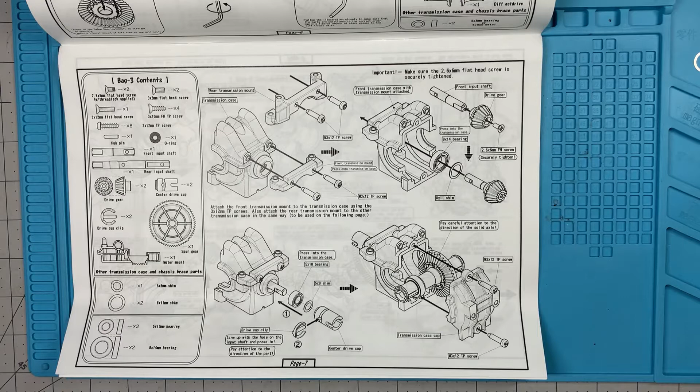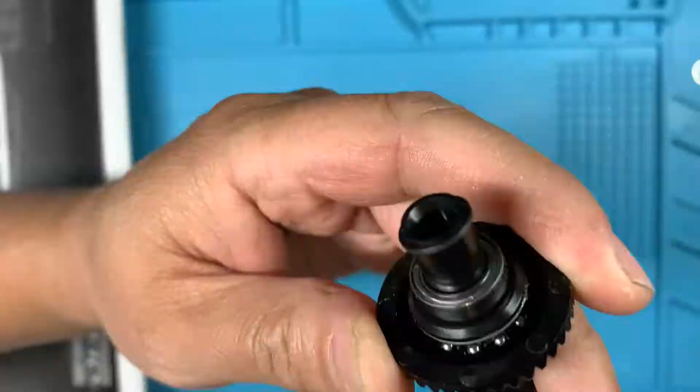Okay, real quick before we get started with this video, as you can see I have some Diff Lube here, and I'm going to apply it to the ball bearings before we get started. So I went back and put some Diff Lube into the ball bearings, just like the manual said. So now we're done, we can move on.

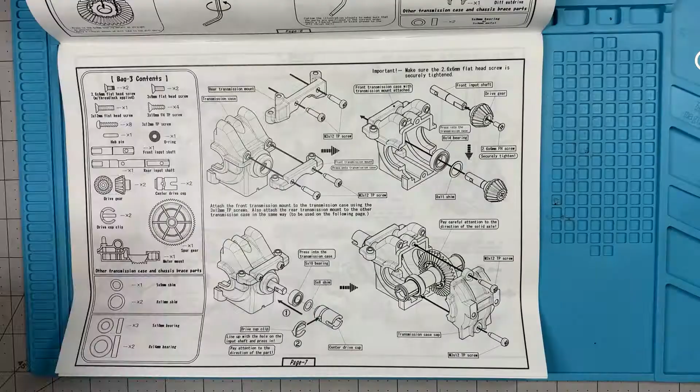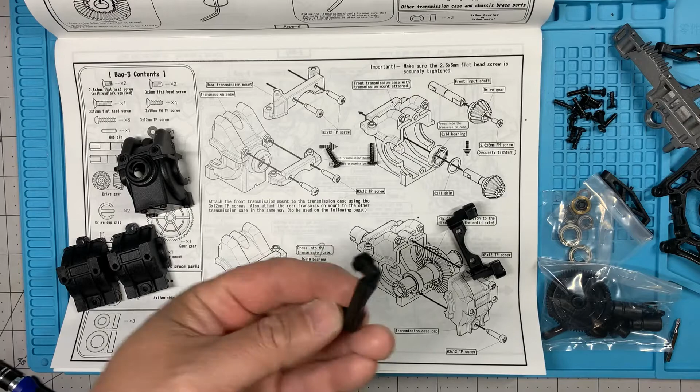We're going to need the contents of bag 3. You can see the transmission cases are identical front and rear, so let's go ahead and work on the front first. It's a little confusing even though it says rear transmission mount here, the top right here is actually the front. So the mount is going to be this piece right here, and it goes up this way like that, and just sits in there just like that. We're going to be using 2 of these M3 by 12 screws.

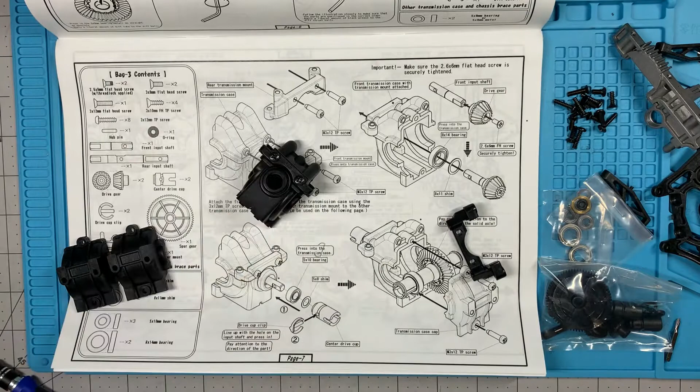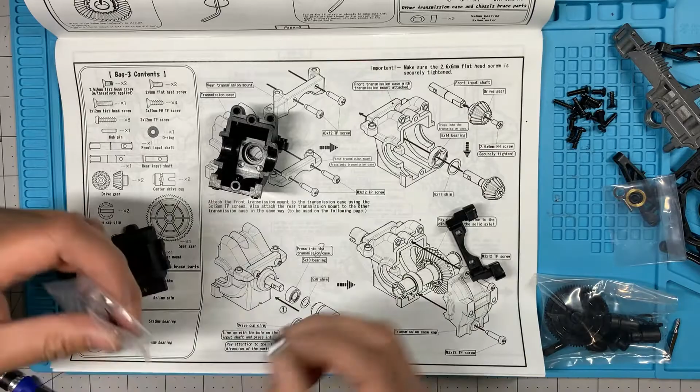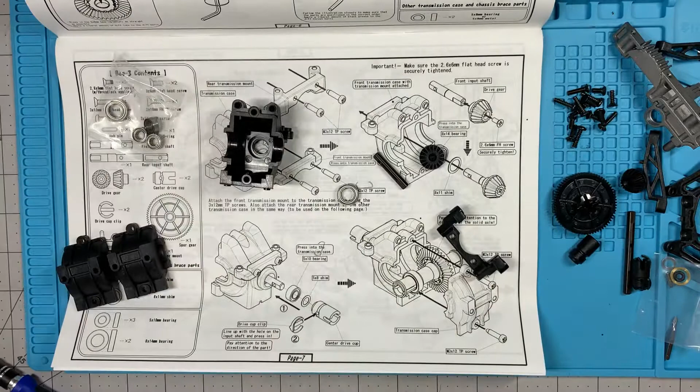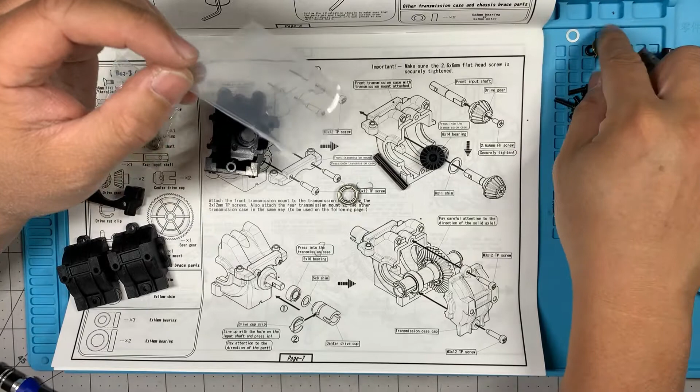Okay, next we're going to turn it over and put in the bearings. Looks like it's going to be that bearing. I'm going to need that. Going to need that. Set that aside. And we need to find the shim right here. Is there only one? I'm going to need 2. Okay, it's going to be this gold one right here.

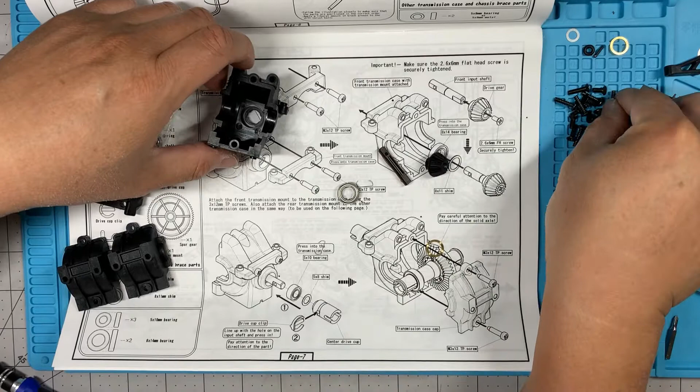So first we're going to build this, and we're going to need a flathead screw. I think it's this one right here, very, very small. Yep, you can see that there's a little bit of blue thread lock on the end here, so this is the one you want. And it's going to go through the gear. Okay, it should seat all the way in. So it's very clean, looks good. Just like that.

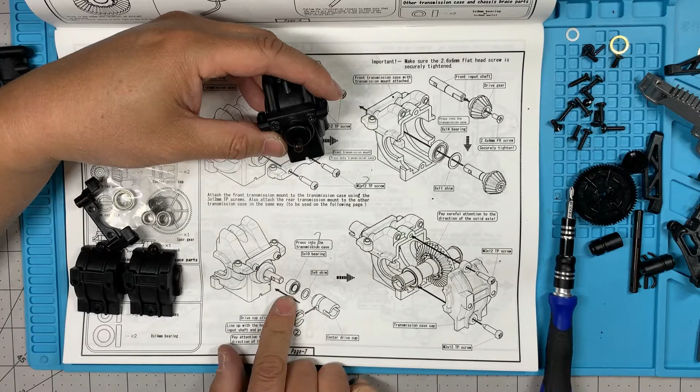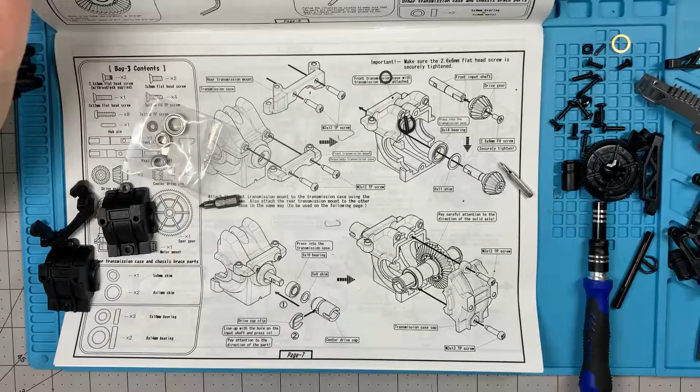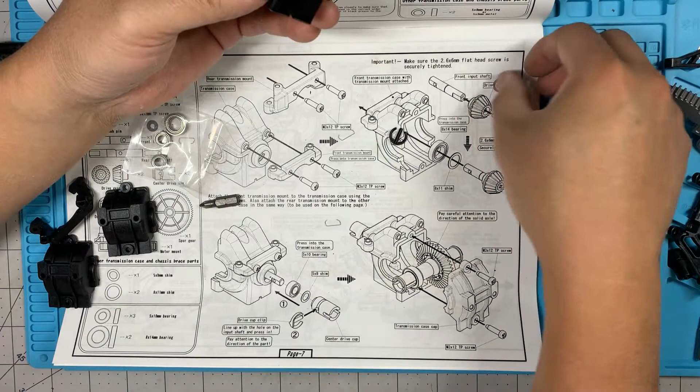And then on the front, on the other side, when it comes out on this side, we're going to need another bearing, a smaller shim, and then the drive cup. So it looks like it's going to be one of these smaller bearings. Okay, before you start assembling this, you have to make sure this bearing is flush against the face of the case there. So that's the bearing, and then the shim, and then the drive cup. If it's not all the way in, the drive cup will not line up with the input shaft.

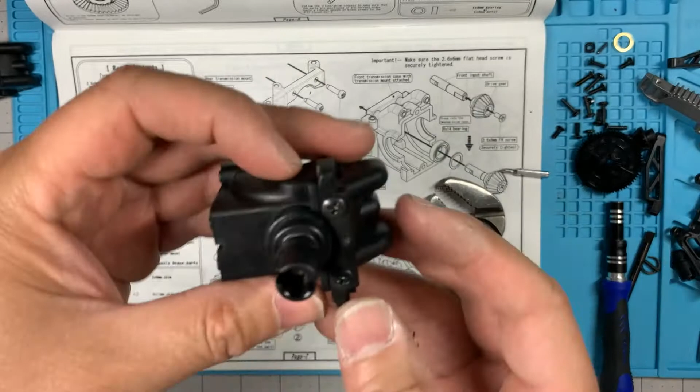See that hole? I'm just going to push this through. Now this piece right here has 2 sides, you can see it's shaped like that, and the hole is shaped like this, so you need to make sure this is turned correctly this way. Having a real hard time getting this to go through, so I'm just going to try this gently, and it goes right through. Just like that. Make sure it goes all the way in. Okay, it should look like that when you're done.

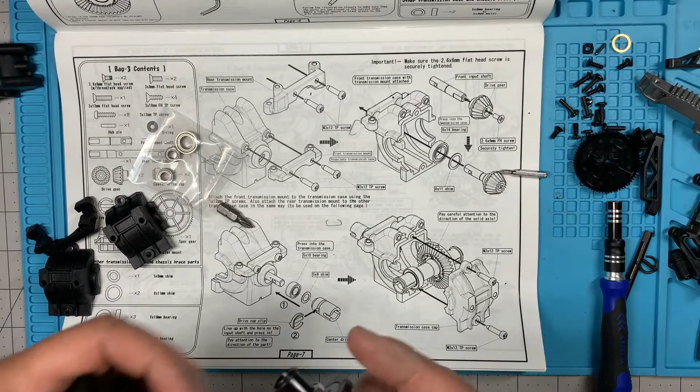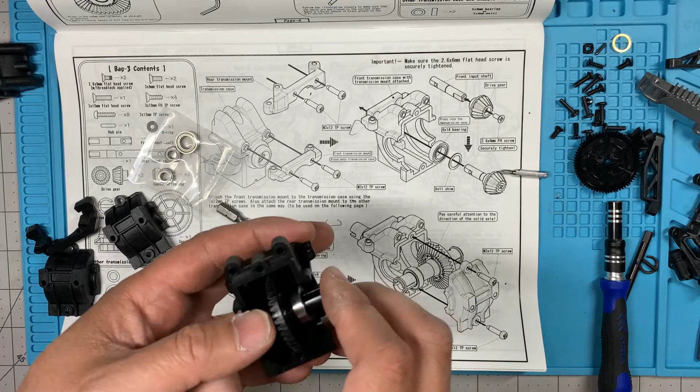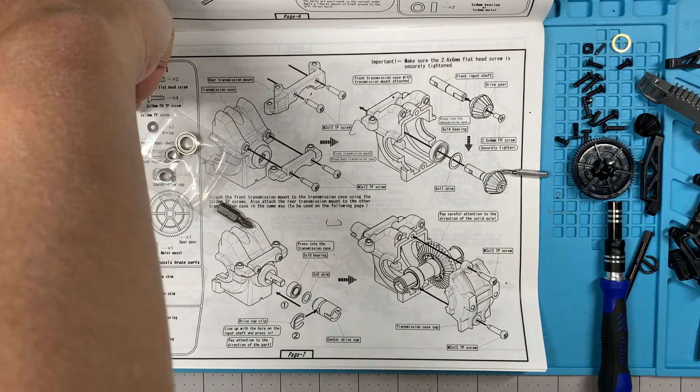Okay, let's move on. Remember, we're building the front transmission case right now, and the front diff actually looks like this. Remember, there's screws on this one. So let's line this up correctly. The mount is on top, and the gear goes this way, just like that. Line up with the bearings. Okay, the bearing seats right into the side of the transmission case. And then we're going to close it up with that, just like that, with a couple of the same screws. There's one, and there's another one right there, and it's going to go here and here.

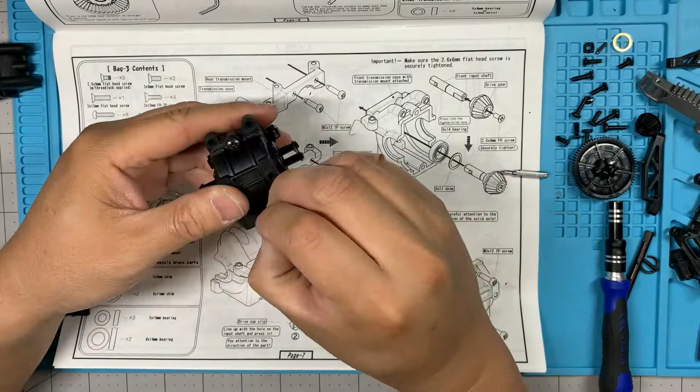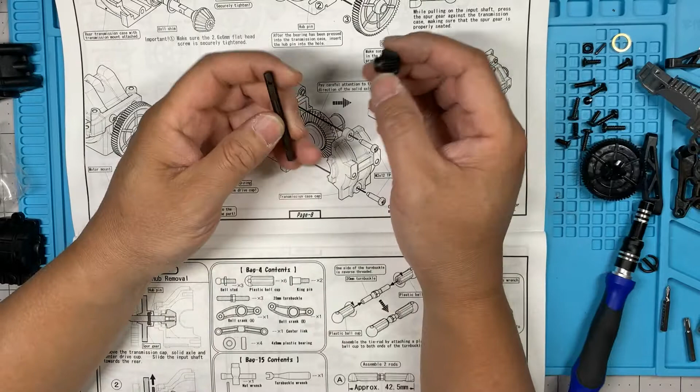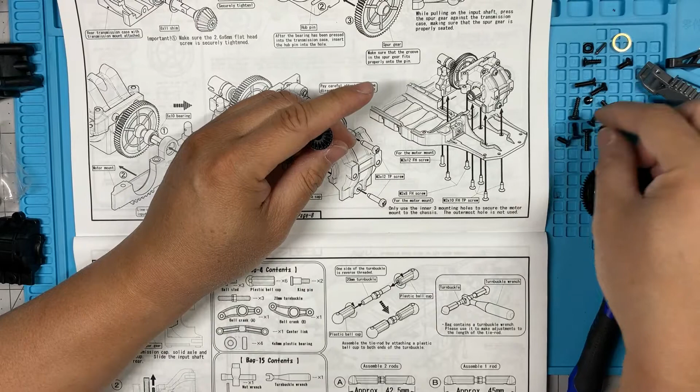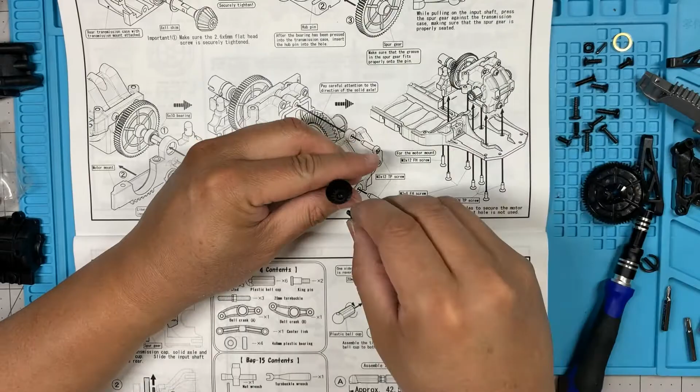Let's work on the rear gearbox, which is going to be very similar. We're going to build that gear again. So this time it's going to be this gear along with the longer drive shafts right here, and it's going to be this way. Just want to make sure it goes all the way in. And it's going to be the very small flathead screw with a little bit of Loctite at the end. There you go, it's that one. Just like that.

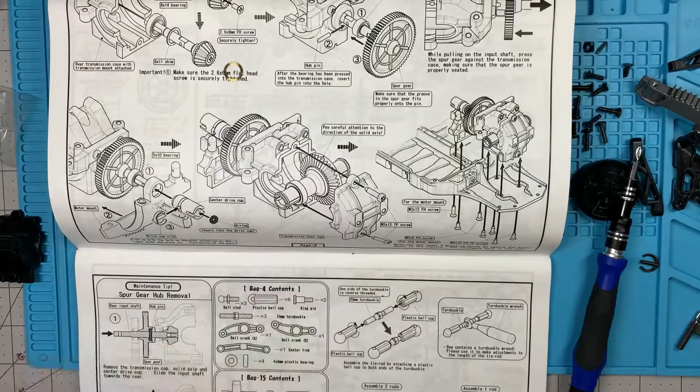Just like the other side, bearing, shim, and then this one goes in first. This time I'm going to drop it in this way. Okay, make sure the bearing is all the way in and that we don't lose the shim. Just like that.

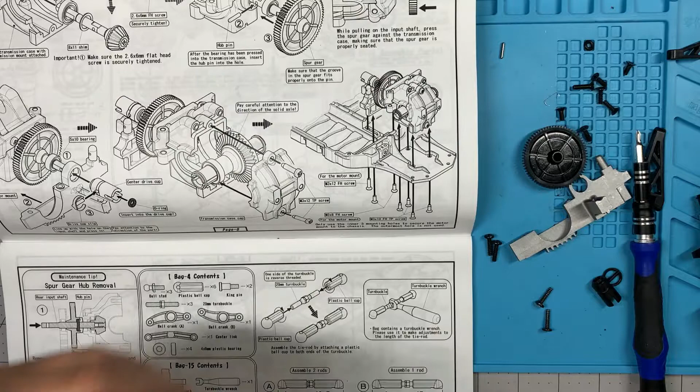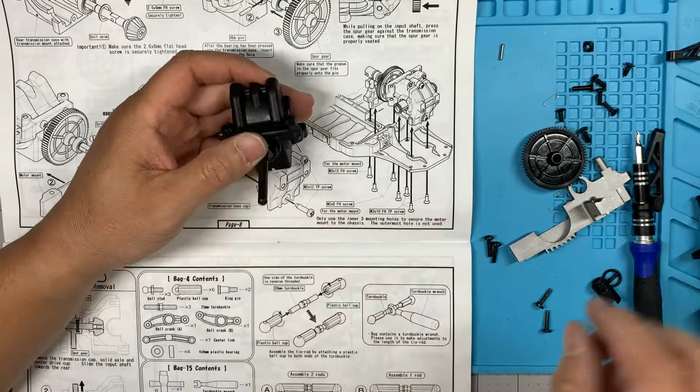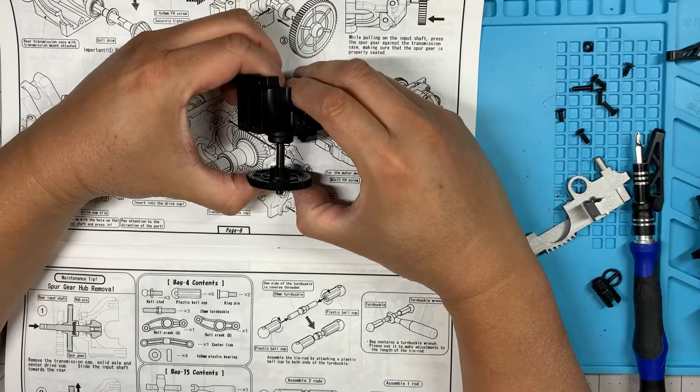And then on the other side, we're going to have a pin, then the bearing, and then the spur gear. All right, before we put the spur gear in there, I need to make sure that we put this on. We forgot. Okay, let's start the spur gear. All right, now I can put the pin in there and then push it back in. Okay, just like that. Make sure this gear is pushed all the way through and make sure the spur gear goes all the way down.

And next is going to be the motor mount, and it's going to sit like that with the drive cup. Again, needs to line up perfectly with that hole inside. Looks good. And then we're going to put this pin through again, all the way through, and now we're done.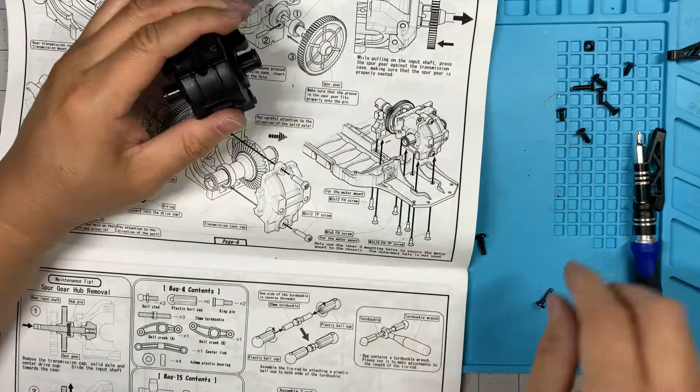I'm going to turn it around and drop the diff in, and let's just make sure we're correct. So these are the two holes on top, and it's going to go this way. And then the cover. Remember this side we need to put the O-ring in there, the rubber O-ring.

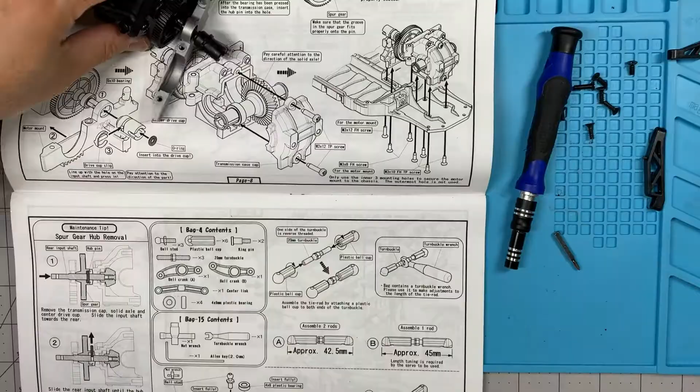And now we're going to mount on the chassis. Okay, there's the chassis. If you remember, it says rear right here, this is the back side. And we're going to drop it in straight like this. So this edge will touch this edge. The spur gear will be just outside of that. And then the motor mount is actually going to sit in this channel right there. So it's easier if you kind of line it up from the side.

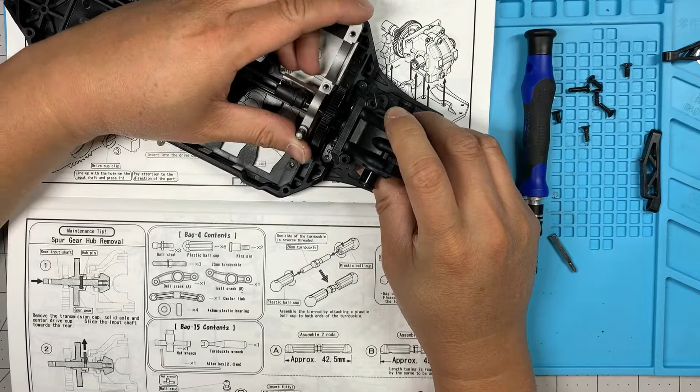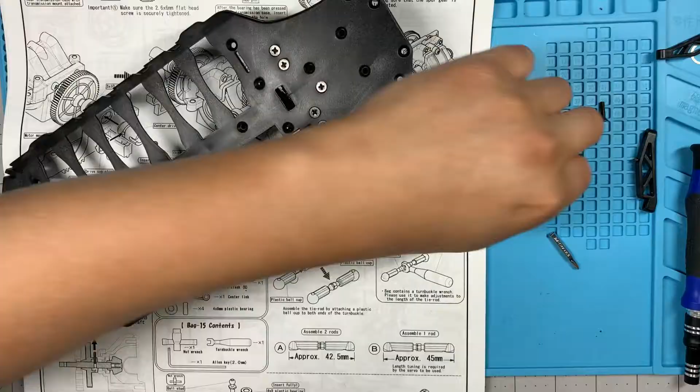Perfect, very, very snug. Very well-made kit, there's very little back and forth on these parts. Let me screw that in and make sure everything looks good. First, let me put these four here. Okay. Then this one and this one.